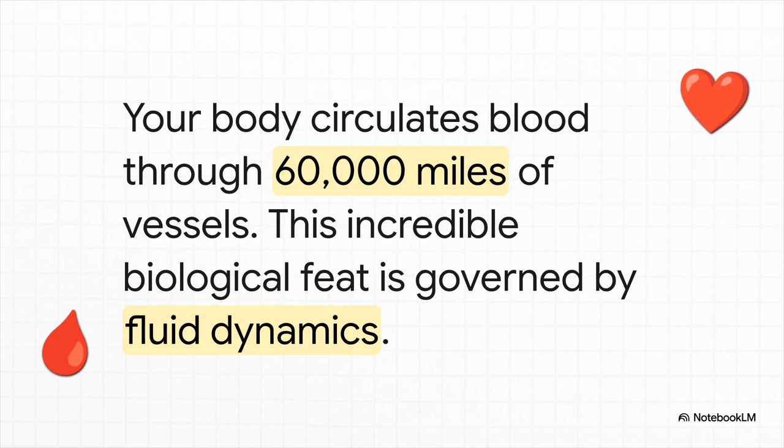And then think bigger. How can we even begin to predict the chaotic, swirling path of a hurricane? Or on the flip side, how do we design a submarine that can slip through the ocean completely silent and undetected? These problems sound totally unrelated, but they all share the same secret.

The answer to every single one of those questions is fluid mechanics. It's the science of how fluids, things that flow, behave, whether they're sitting still or moving. And understanding it is the key to unlocking some of the most amazing puzzles in nature and engineering.

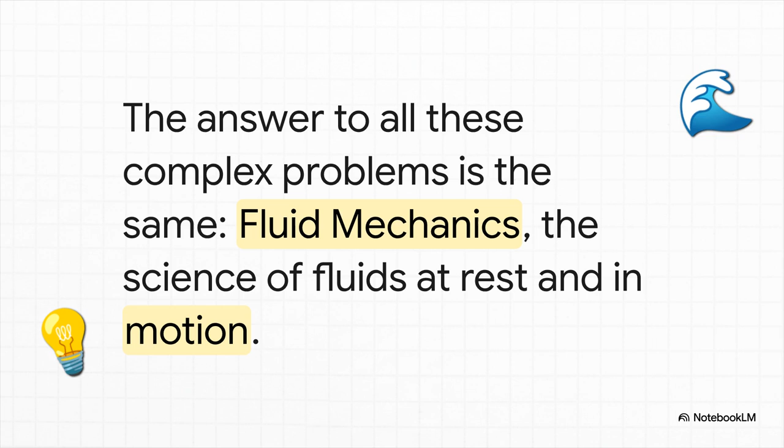So, let's get down to it. What really is a fluid? We all kind of know that liquids and gases are fluids, but what actually makes them different from a solid? Well, it all comes down to a really simple idea: how they react when you push on them.

Think about it like this. If you push your finger into a solid block of rubber, it squishes a little, it deforms, but it pushes back and it stops. Now, try pushing on the surface of water. It doesn't stop you at all. It just flows. It moves out of the way. And as long as you keep applying that force, the fluid will keep on deforming. That right there, that continuous deformation, is what makes something a fluid.

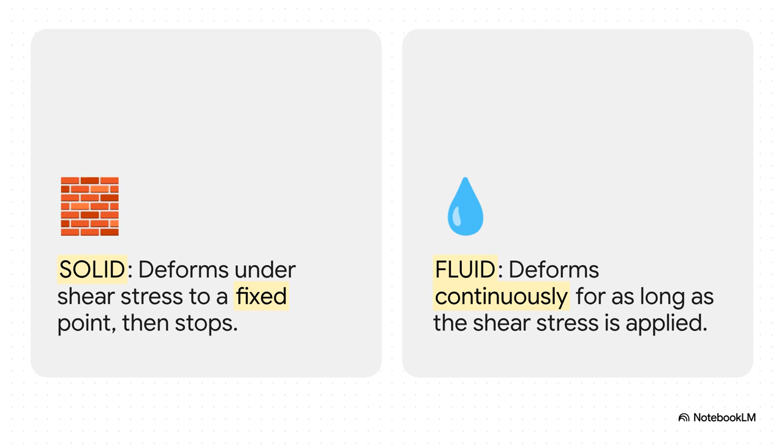Now, that sideways push we're talking about has a fancy name. It's called shear stress. But honestly, the best way to think about it is spreading butter on toast. That smearing force you use with a knife, that's shear stress. It's what makes the butter, which is acting just like a fluid, flow across the toast. You do this every day.

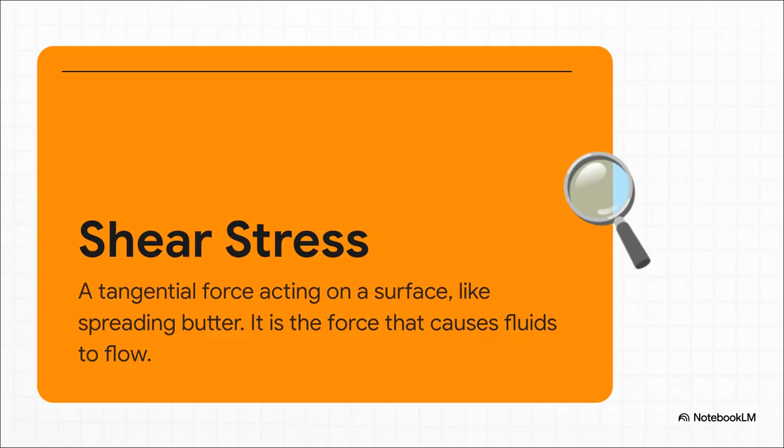But even in the world of fluids, there's a big difference between liquids and gases. You pour water into a glass, and yeah, it takes the shape of the glass, but it always forms that flat top. We call that a free surface. A gas, though, is a totally different story. It'll just expand and expand until it's filled every single nook and cranny of the container. No free surface at all. That's just because its molecules have a lot more freedom to zip around.

Okay, so now we know what a fluid is. The next step is to look at how it actually behaves when it's moving. And a fun way to think about this is that different types of flow have their own unique personalities.

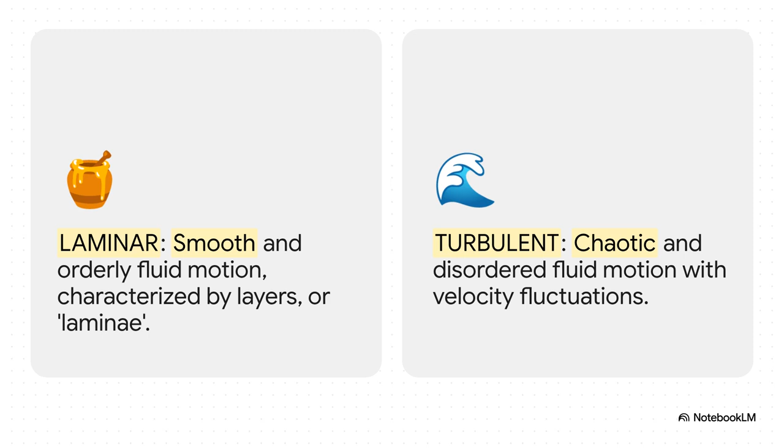First up, you've got the two big ones, laminar and turbulent flow. Laminar flow is the polite, orderly one. All the fluid particles move in these smooth, neat layers. Picture honey pouring slowly out of a jar. It's beautiful and predictable. Turbulent flow, on the other hand, is its chaotic cousin. It's a complete mess of swirling eddies and random motion. Think of a raging river or the smoke coming off a campfire. And fun fact, most of the flows you see in your everyday life are actually turbulent.

We can also sort flows by where they're happening. So internal flow is pretty straightforward. It's flow that's completely boxed in, like water moving through the pipes in your home. External flow is when the fluid is open on at least one side, like the wind blowing over your car.

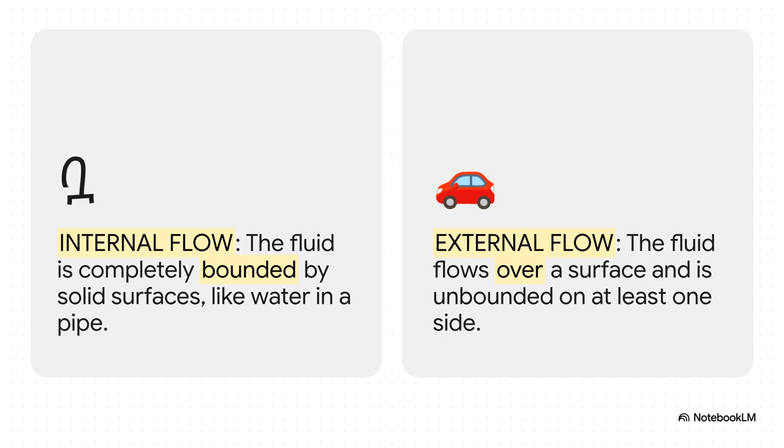This difference is super important for engineers because it totally changes how you think about friction. Then there's density. For most liquids, like water, you can push on them all you want and their density basically stays the same. We call that incompressible flow. But with gases, especially when they're moving really, really fast, their density can change a lot.

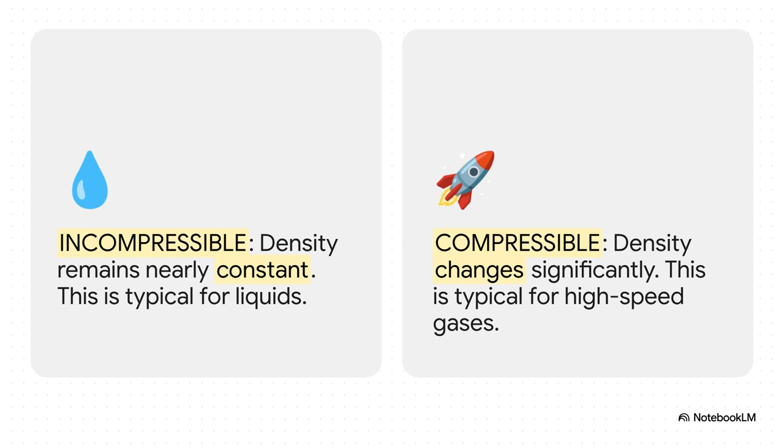That's called compressible flow, and it's absolutely critical for designing things like jet engines. So when does that change in density really start to matter? Well, for air, engineers have a fantastic rule of thumb, Mach 0.3. If the air is moving slower than that, which is about 225 miles per hour, you can pretty much just ignore the density changes and pretend it's incompressible. Why is that so great? Because it makes the math so much simpler. It lets you design cars and buildings without needing a supercomputer for every single calculation.

Now, you have to realize we didn't figure all these rules out in a day. It's actually this incredible story of human curiosity and genius that's been unfolding for over 2,000 years. The story really starts way back in ancient Greece with Archimedes and his famous Eureka moment in the bathtub. But then it jumps forward to the 1700s when Daniel Bernoulli gave us the math that connects a fluid's speed to its pressure. Then, a century later, Osborne Reynolds figured out what makes a flow switch from smooth to chaotic.

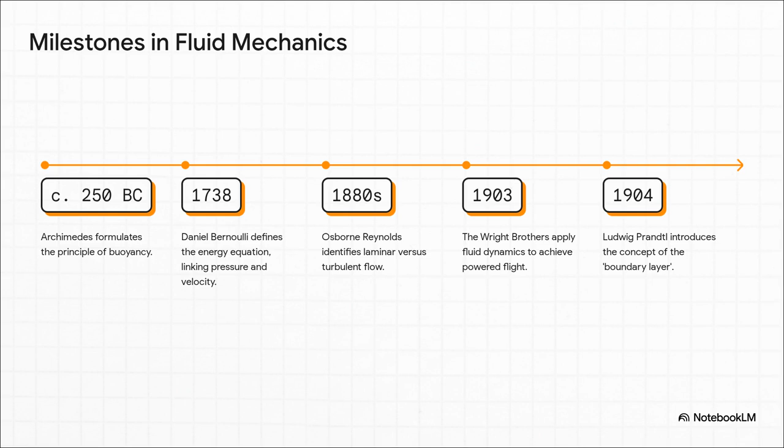Every single one of these discoveries was like a new tool. And by 1903, the Wright brothers had the exact toolbox they needed to finally design a wing that could generate lift and achieve powered flight. It's an amazing chain of events.

All right, so that's a lot of theory. Why does any of it matter to you? Well, because this is where we see the payoff. Let's connect these ideas back to the world you actually live in. Just take your car. It's basically a fluid mechanics lab on wheels.

That sleek, streamlined body, it's all about mastering external flow to reduce drag and save fuel. But at the same time, under the hood, you have this whole network of internal flows, fuel getting pumped to the engine, coolant circulating to prevent overheating. And covering the entire car is something called the no-slip condition, which just means the air right next to the car's body sticks to it because of viscosity, creating friction.

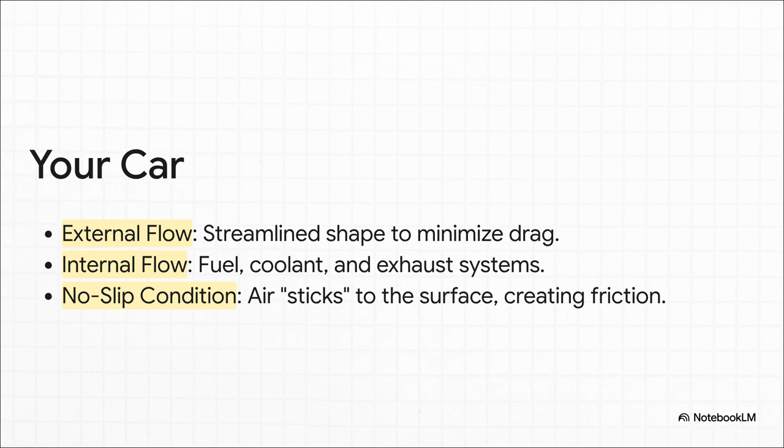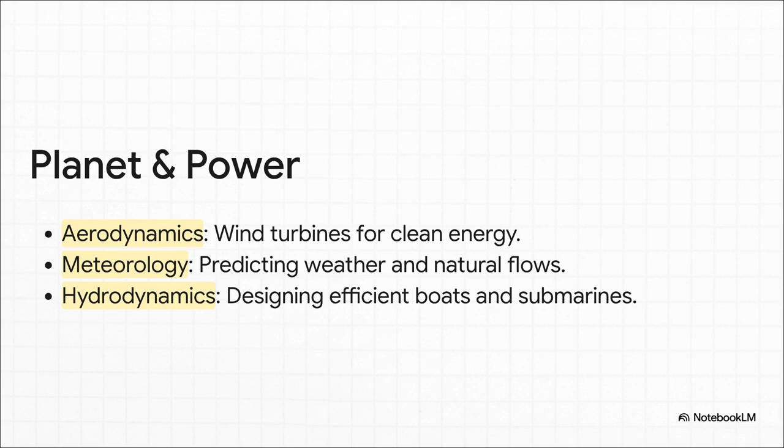And when we zoom all the way out, you see fluid mechanics running our entire planet and powering our civilization. We call it aerodynamics when we use it to design wind turbines that capture energy from the wind. We call it meteorology when we use it to predict weather, and we call it hydrodynamics when we use it to design the hull of a ship so it can glide through the water efficiently. It's all the same science.

So the next time you see a plane slice through the clouds, or just feel the wind on your face, take a second to think about that incredible, invisible science that's making it all happen. From modeling our climate to building artificial hearts, fluid mechanics is right there. It really just leaves you wondering, what's the next great challenge we're going to solve with it?